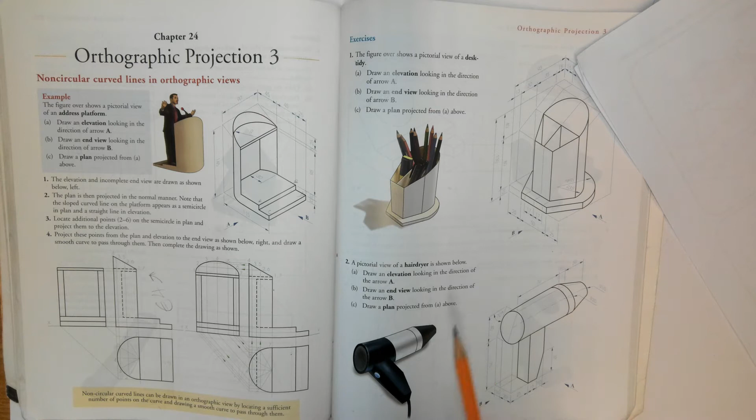Question 2. A pictorial view, a 3D view of the hairdryer shown. Draw an elevation looking from arrow A. Draw an end view looking from arrow B. And part C, project a plan from arrow A. So, right, quick sketch here.

The elevation. Now, the cylinder is 110 long from here to there. So, I'm going to go lightly 110. Okay, this is 30, so I'm going to mark in 30 from the end there. And then the band is 10, so I'm going to do my 10 there. Now, the radius of the cylinder is 20, diameter is 40. So I'm going to go down here, 40, line across there, and I'm going to find the center.

Now this one is radius 10, so I'm going to go up 10, down 10, and then I can join these together. And then I can heavy over my 110, and the angle is 70 degrees, so I'm going to do my 70 degree angle. Okay, the handle then is in 25 from this corner, so I'm going to go over 25, mark it up lightly because I don't know where this line stops. That can only be seen in end elevation. Over 15, up 37, so this distance here, over 10. I'm going to bring this up again lightly as I don't know where to heavy that, and heavy it in.

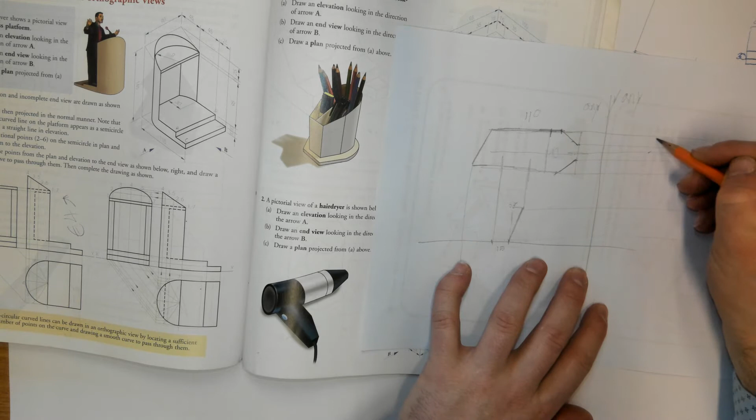Now I can do the end elevation, so I'm going to project my lines over. So it's XY line, any distance. This is any distance as well to start your elevation, but something simple. Don't do 200 millimeters, do 20 or 30 millimeters or 5 or 10. Now, radius 40 again for the big circle. Radius 10 for the smaller circle and it's hidden detail. The handle is stepped, right? Okay, this is where it's tricky.

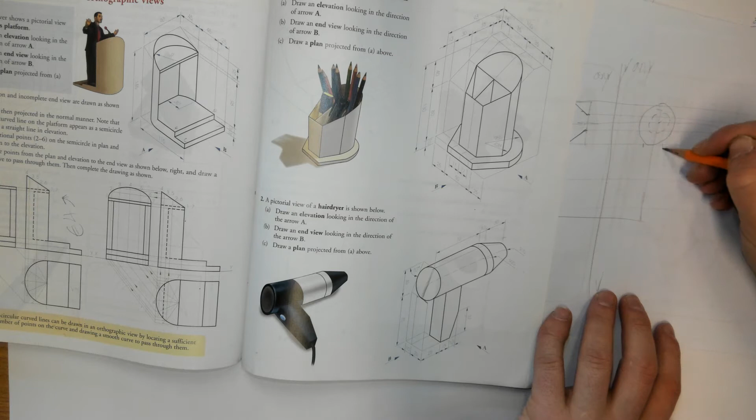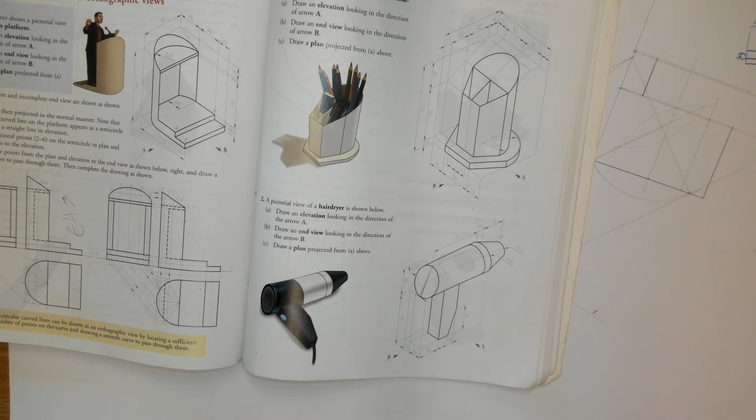Okay, I'm just going to pause my video and get my stuff.

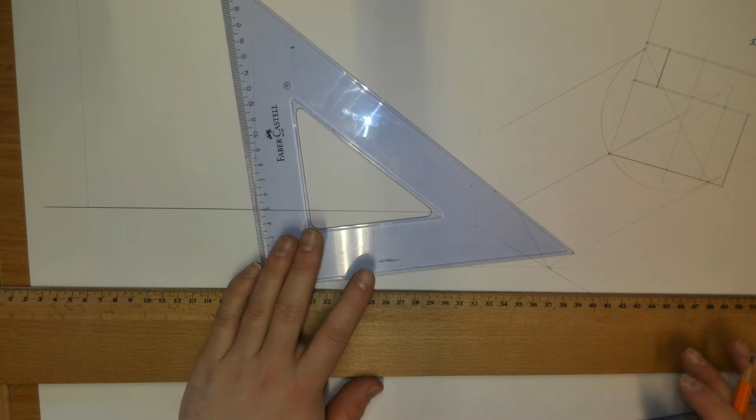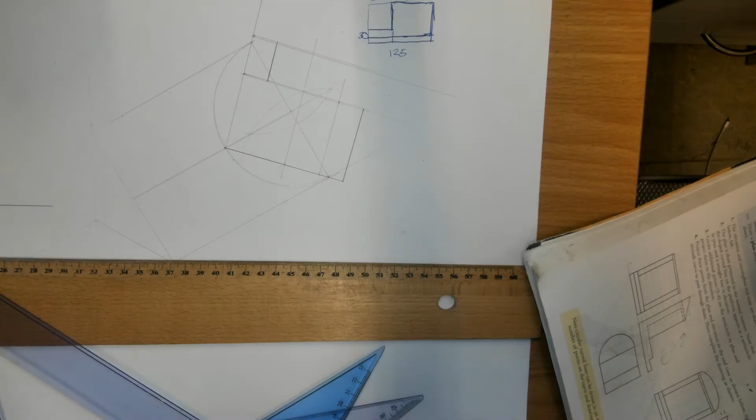So my XY line, okay, we set, I'm going to mark 110. Now, the height of the center line of the cylinder is 95 up. So I'm going to go up 95. Okay, now I'm going to just have to move everything over here now. So I'll just pause that. So I went up 95.

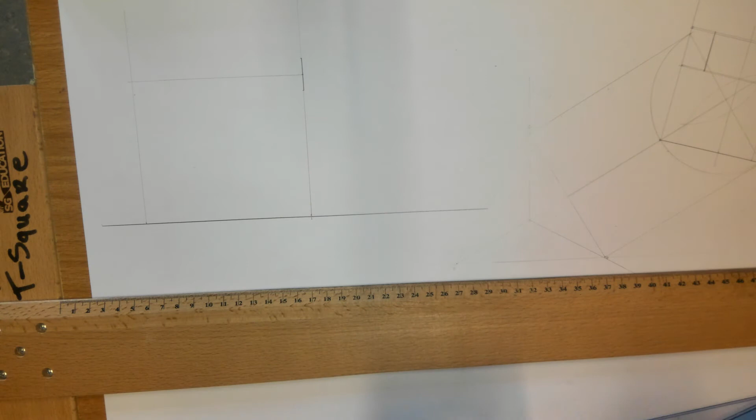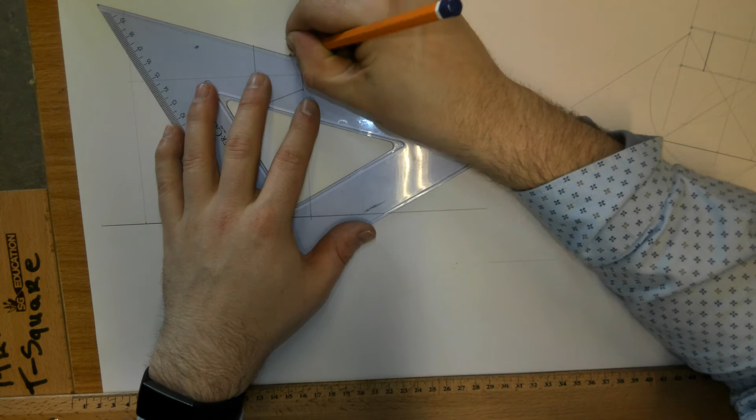Now, I'm going to heavy 10 up and 10 down. Okay, and that's the nozzle of the hairdryer, where the air comes out. Then the band is over 30, so I'm going to measure over 30. And then from the band, I can measure up 20 and down 20. I'm going to heavy these two together. Okay, I can draw this point all the way over. So that's the top generator here.

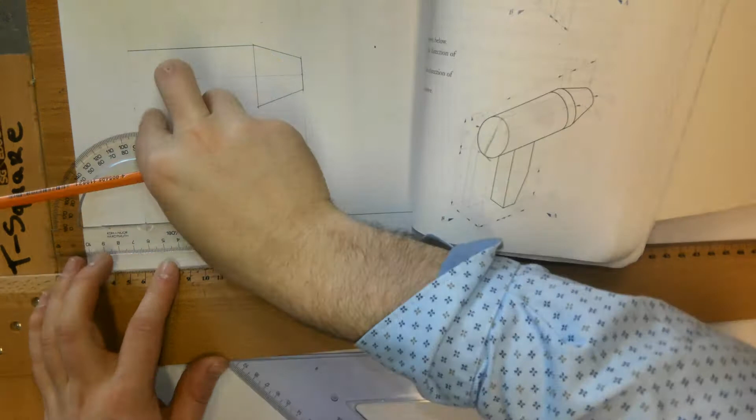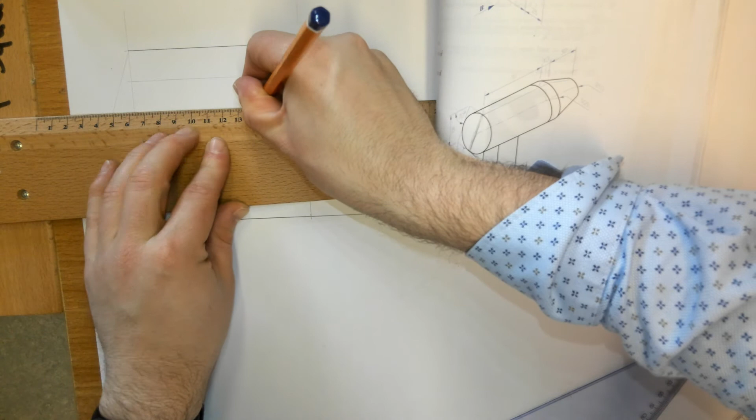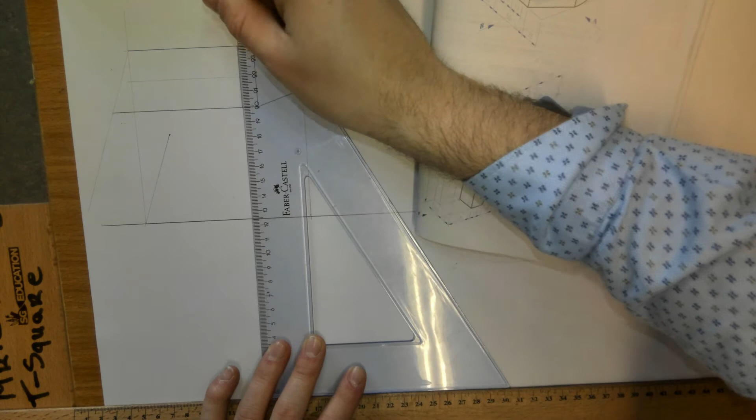That's the top generator. Okay, the angle is 70 degrees, so I'm going to get my protractor. So I'm going to mark a 70-degree line. And then I'm going to draw a line parallel to it. And now you heavy the hairdryer over until it hits that. So that's how you get the bottom of your hairdryer. Then the band is in 10. So this band here is in 10. So I can mark that in.

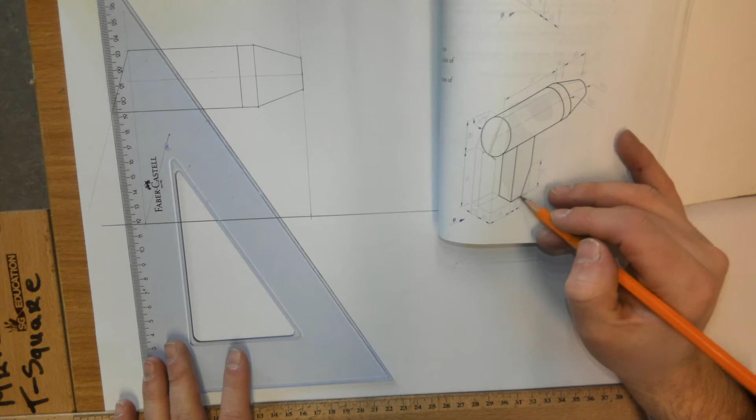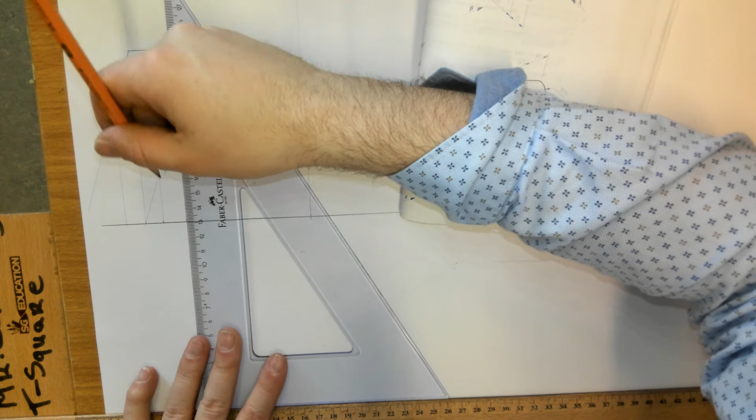Okay, now I'll do the handle. It's over 25 from the bottom. The thickness at the bottom here is 15. Then its total is 25 thickness, and this point is up 37. So I'm just going to drop that down. Measure over 25. Marking the distance of 15 and 10. Light lines up, because I don't know how far to go. And then I can measure up 37, and I can heavy this here.

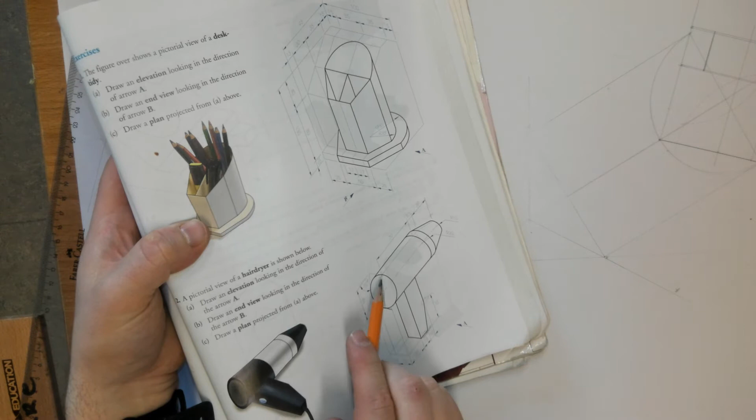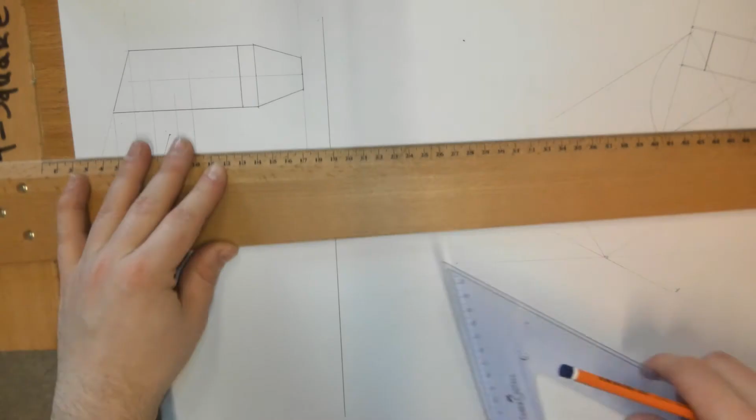Now I'm going to start on my end elevation. So looking from arrow B, I'm going to see two circles, a heavy detail circle and a hidden detail circle, and I'm going to see the handle. So I can draw in my YY line. I can bring my heights from elevation across. Okay, so I'll go out and start the center line of my end elevation. We'll say I go out 40, 50.

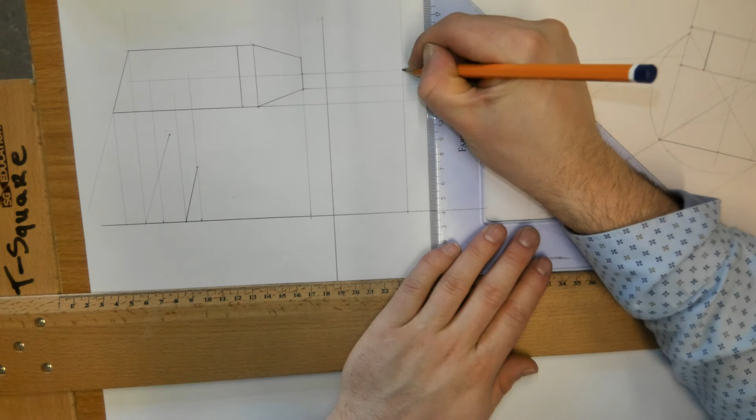So there's the center point for the big circle. The radius of the big circle is radius 40. So I'm going to mark in 40. The radius of the hidden detail circle, the small circle, is radius 10.

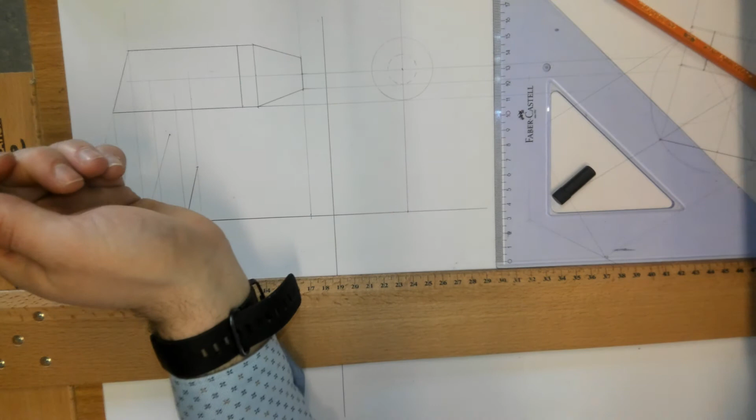Radius 10. Now the handle is 10 out from the center, either side, so mark 10 left and right of the center. And we're going to heavy this right up until we hit the circle. Now that's the height of the handle in elevation.

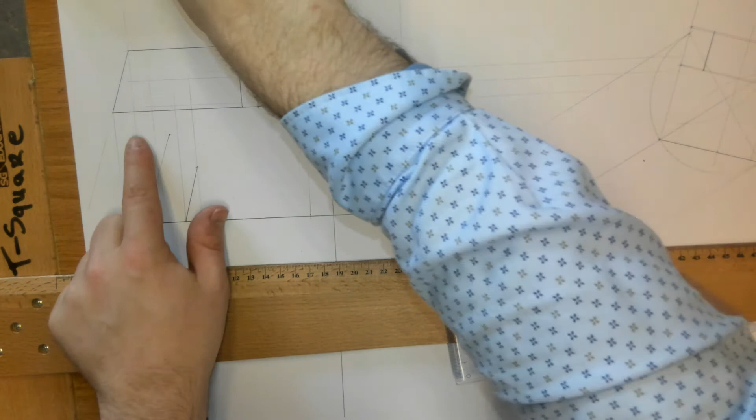So I'm going to bring these points across, and now I shouldn't have heavied that in there. Don't know what I was doing. I didn't need to heavy that in yet. Now I'm going to heavy down there. So a reminder, you bring that across, it hits there, and then you can heavy down. And the same here, you can heavy down there.

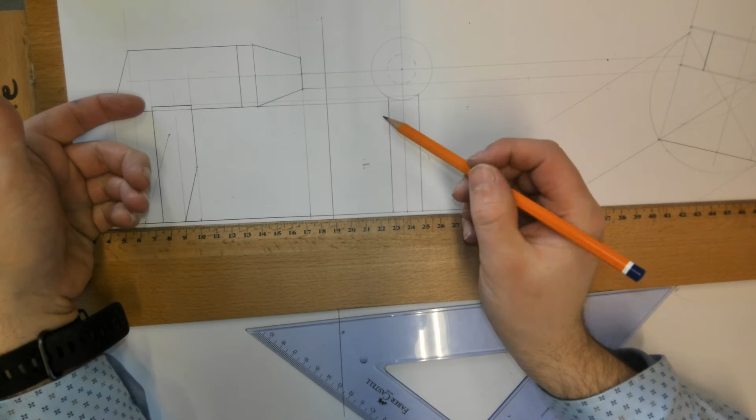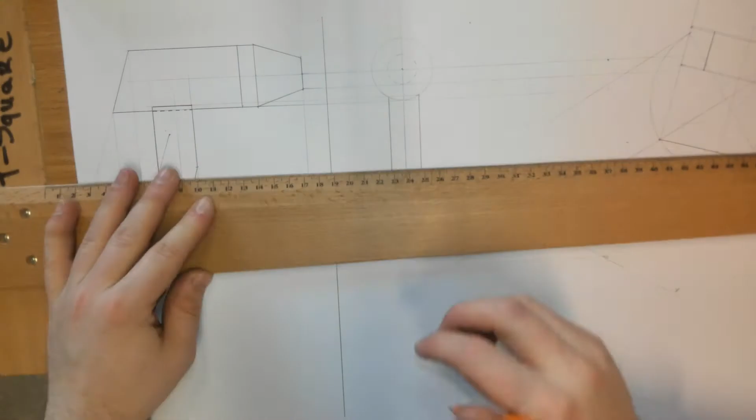And then there's a heavy line here, because two surfaces intersect at a line, so there's a straight surface and a curved surface intersecting at a line here, which appears as a point. And then that's hidden detail. Okay, and then we have some hidden detail here.

Okay, so to get the rest of this, we've our end elevation done and our elevation. So we're going to draw our 45-degree line. We're going to bring these down, okay, and across. Right, here's your handle. Here now is hidden detail.

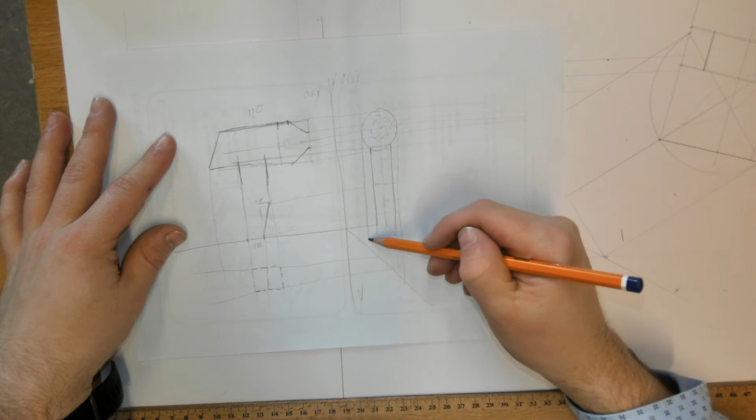Now, the body of the hairdryer, you bring the vertices of the circle down, across. Here's the small one. Here's the big one. The band then. Okay, so we can heavy these on. But then, that's where it gets hard.

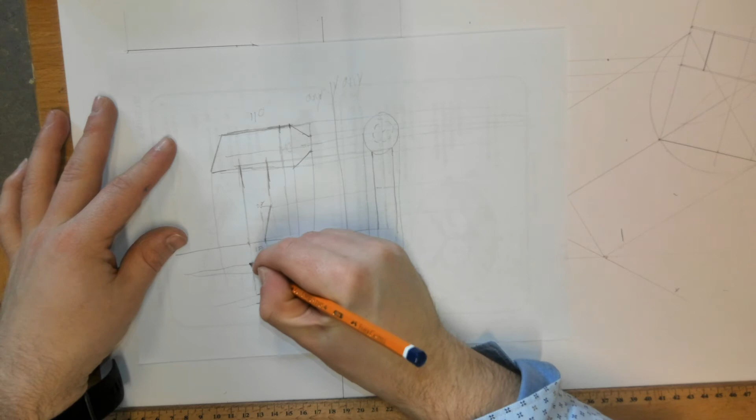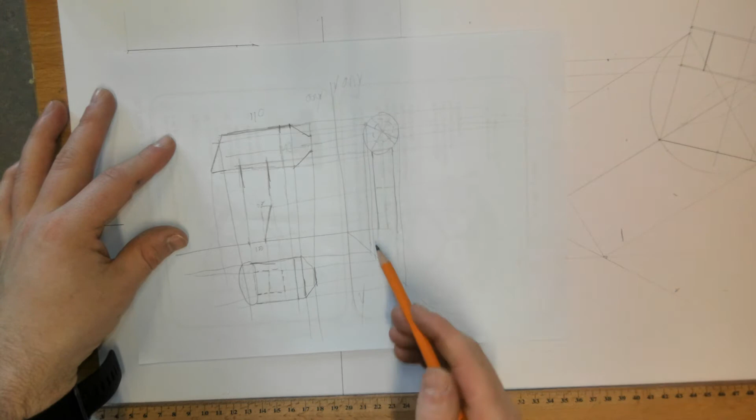Okay, so what are we going to do to get the elliptical curve in plan? Well, what we have to do is divide these into 60-30. Here's how you get points in the curve. They follow the same pattern. You divide it up into 60-30. You bring it over until it hits there. Bring it down, and bring this point down across until they intersect. And that's how you get points on the curve. So I'll actually do it. Right.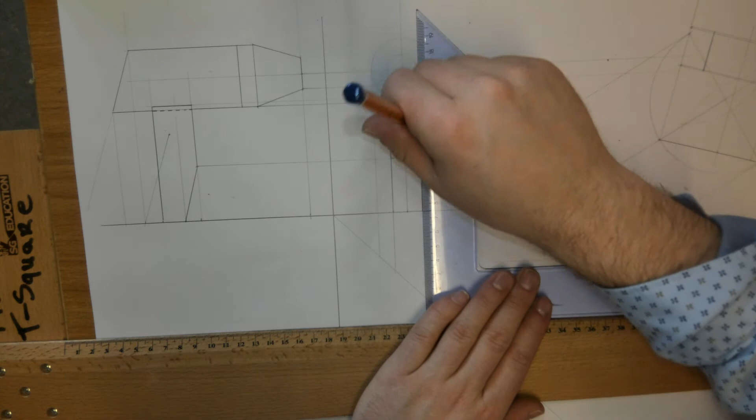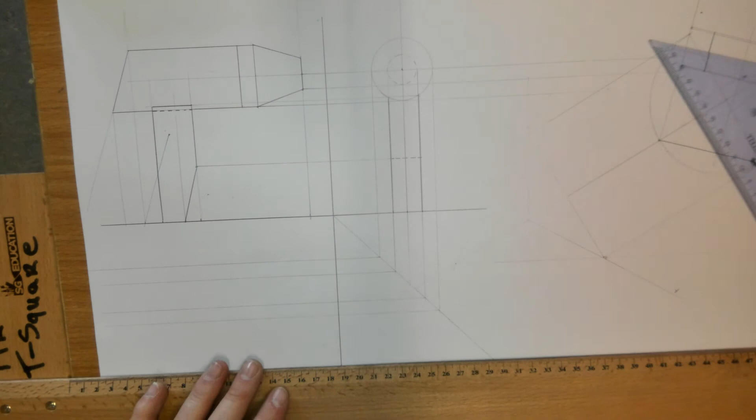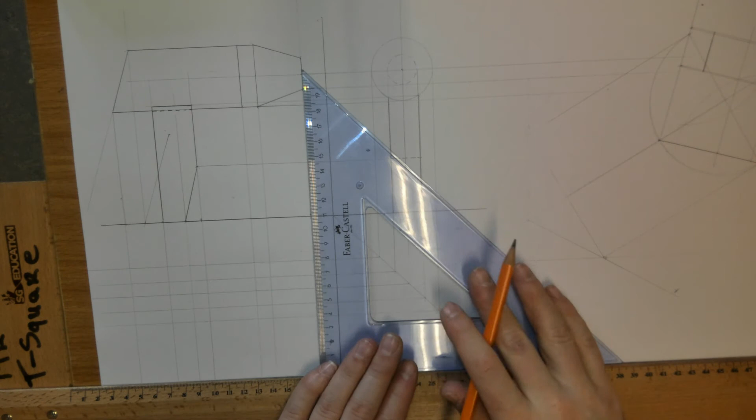So 45-degree line. Bring my handle down. Where they hit here, bring them across. And then bring your points from elevation down. Right, now that's the small nozzle. Here's the band here coming.

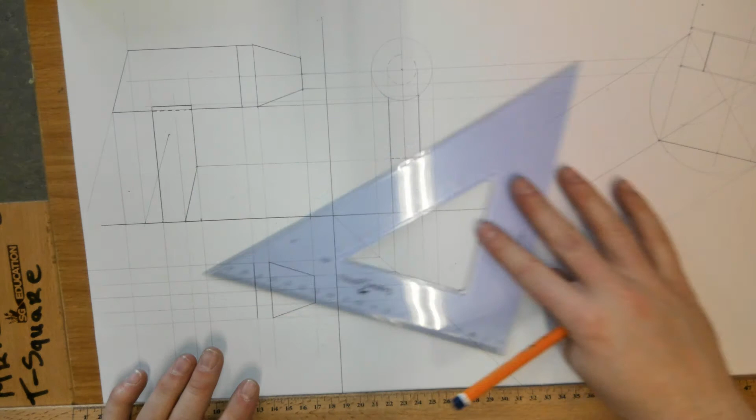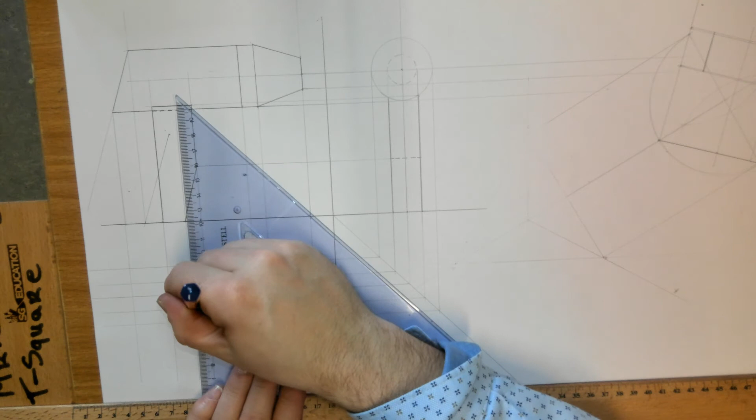Now the handle from here. All hidden detail, and then a further hidden detail line here, because the line here in plan appears as a point in elevation. Now, to draw the curve in, the elliptical curve, we're going to divide it up into 60-30.

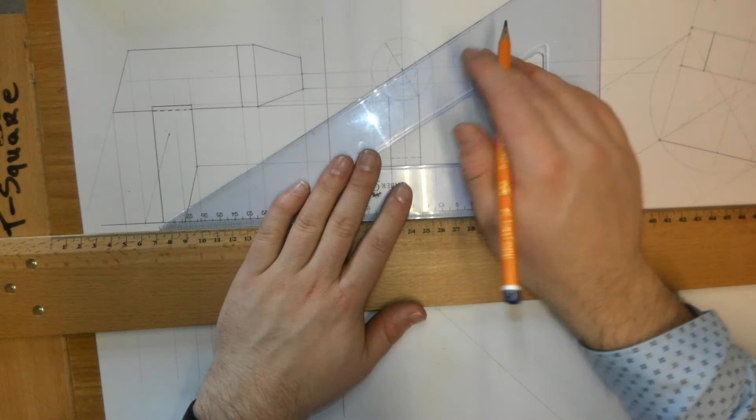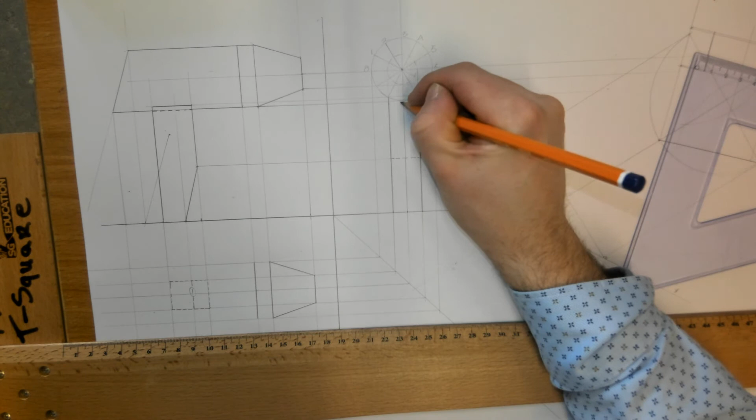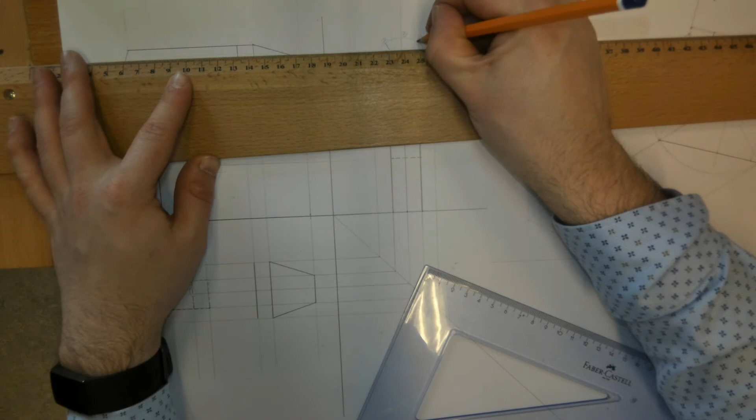So we'll label our points 0, 1, 2, 3, 4, 5, 6, 7, 8, 9, 10, 11. Now, we need to get our points in elevation. The curved surface appears as this line in elevation. So I'm going to bring 10 and 8 over until they hit the curved line, 7 and 11 over until they hit the curved line, 6 and 0 over until they hit the curved line, 5 and 1 over until they hit the curved line, 4 and 2 over, and then there's going to be 3.

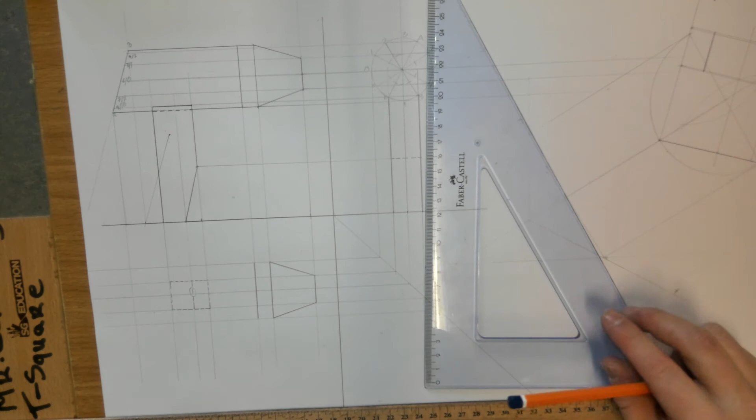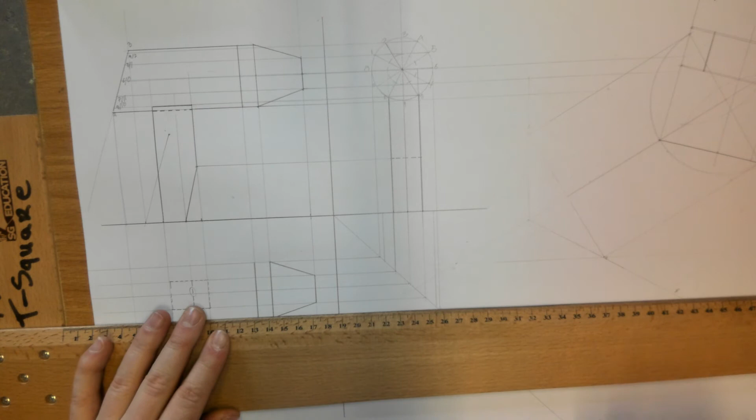That's the 4/2, 5/1, 6/0, 7/11, 8/10, and 9. Now I need to bring these points down until they hit the 45-degree line. So I just bring them half down, so it makes it easier for you, just from the XY line. It's not as complicated then, and then only half over, so it makes your life simpler then.

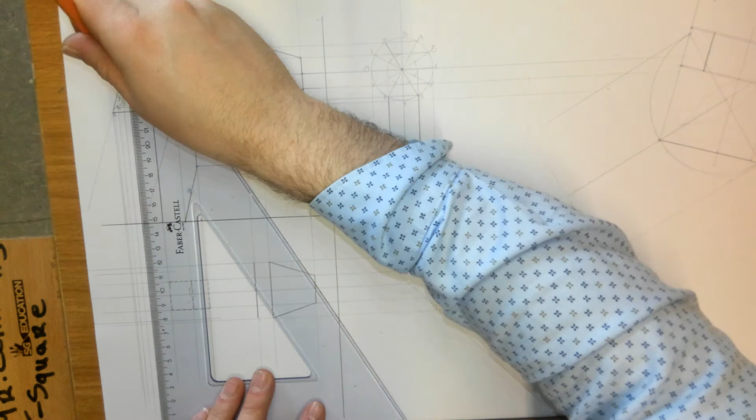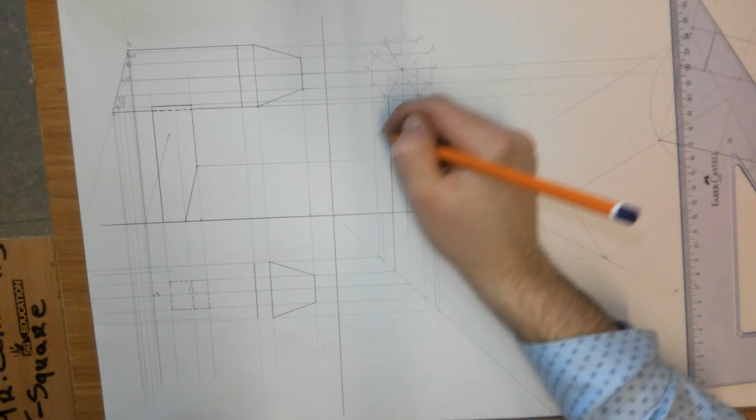Right, now we need to drop all these points down from elevation. Okay, now you follow 3 down, 3 across, and 3 down from elevation. So there's 3. Then 4 and 2 down and across, and then 4 and 2 in plan until they match up. Then you do 5 and 1 down, across and down from 5 and 1.

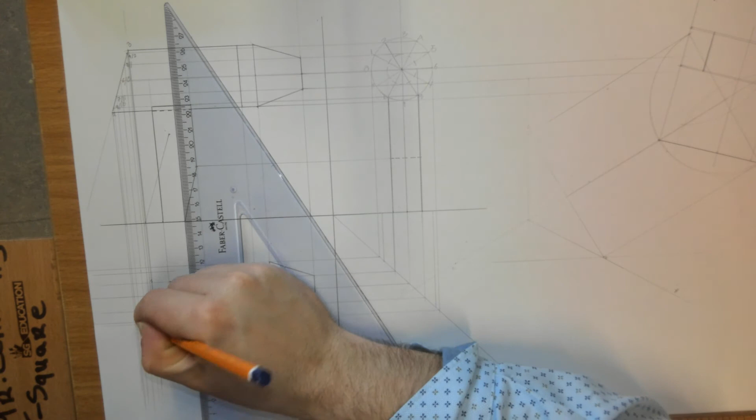So there's 5 and there's 1, and then you do 6 and 0 down across. There's 6, and here's 0. Then you do 7 and 11, so there's 7, there's 11. Then you do 8 and 10.

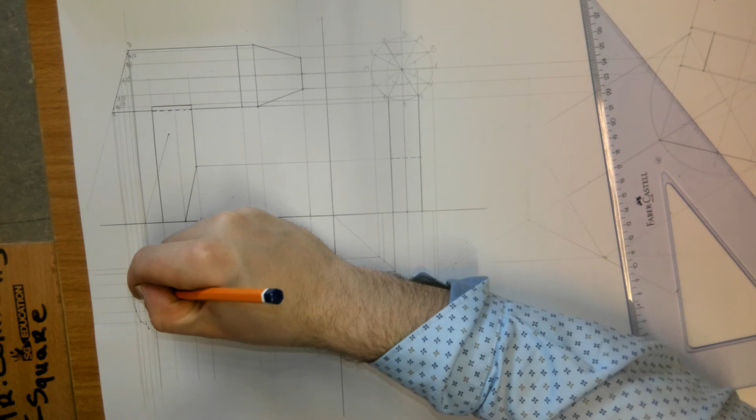You bring 8 down, 8 across, and 8 down from here, and where they intersect gives you 8 and 10, and then 9 down, over and 9 down from here until they intersect, and then you can freehand sketch the curve in. Okay, and then I can heavy these lines here.

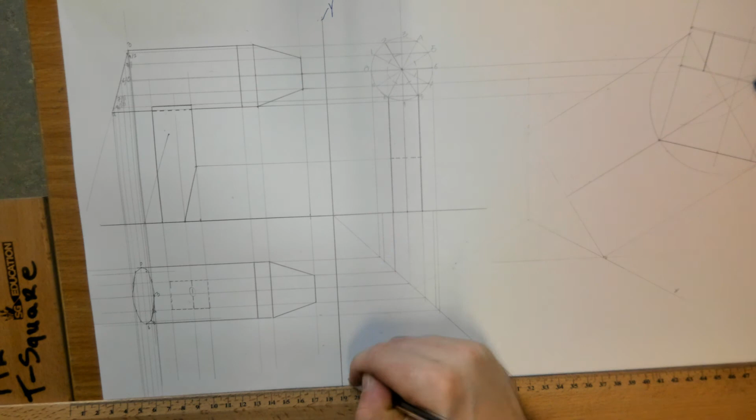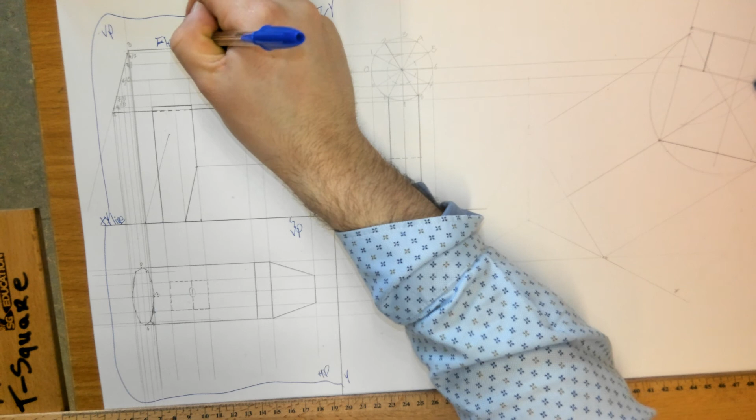Now, notes: XY line. This is the HP, horizontal plane, VP, HP, VP, elevation view. End elevation. VP, HP. Okay, color will be no harm to add in.

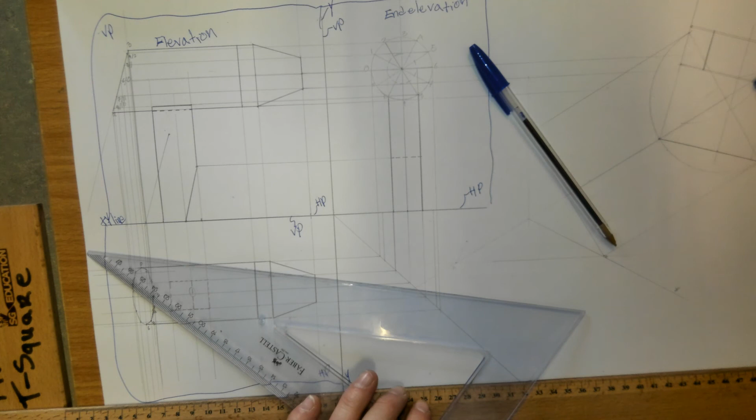So how you got these? So down, across, and then down from the point in elevation until they intersect. Key points. See it as a circle. Divide it into 60-30. Get the points on the edge view. And find in a third view.